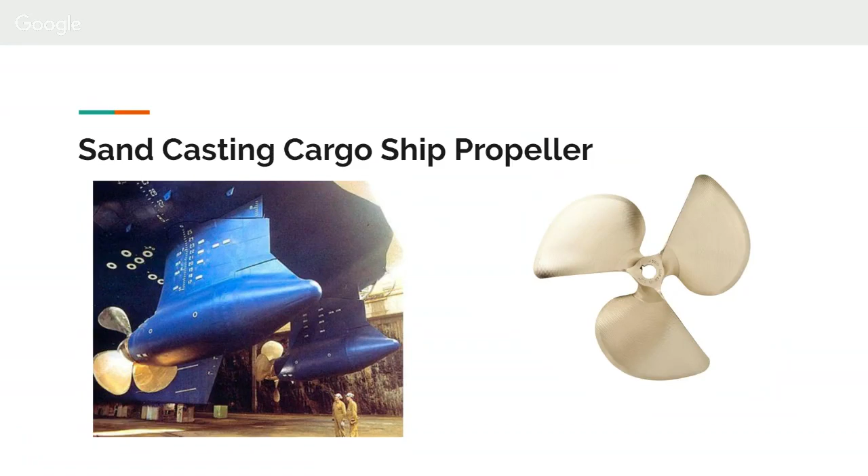My name's Luke Cranford. I'm with Joel Boyett and Mason Scott, and we're going to talk about the process of casting a propeller used for large ships. Here, I'm Mason Scott. This is a couple examples of the type of propellers we're talking about. These are typically found on your large oil tankers and cargo ships that are going from continent to continent, carrying trade goods, things like that.

The design of the propeller, it has to be cast in one solid piece because if there's any seams or anything in it, it'll affect the efficiency. And as you can imagine, the efficiency on these ships is very important. They also have to be lightweight. For as heavy duty as they are, they have to be lightweight to maintain that fuel efficiency, as I mentioned. They also have to be incredibly durable because the lifetime of these propellers, they're expected to last over 1.4 million miles seafaring.

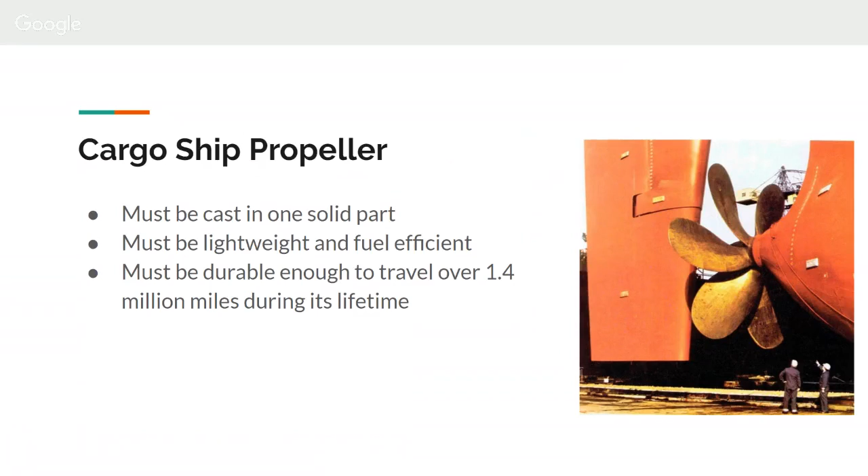The composition of the alloy used in these propellers is predominantly copper, about 80% copper in most cases. The other metals they use are typically aluminum, nickel, iron, and zinc. They specifically chose these metals because the blend of these metals creates a very tough, durable alloy that can withstand all the forces that are going to be thrown at it out there in the ocean, while also maintaining that durability that we mentioned.

And these metals were also chosen because they need to be cast into this mold, and they need metals that will take the shape of the whole propeller, because as we mentioned, they can't have multiple pieces of the propeller just stuck together somehow. The foundry that is required to heat these metals up to liquid is actually heated to an excess of 1,800 degrees Fahrenheit.

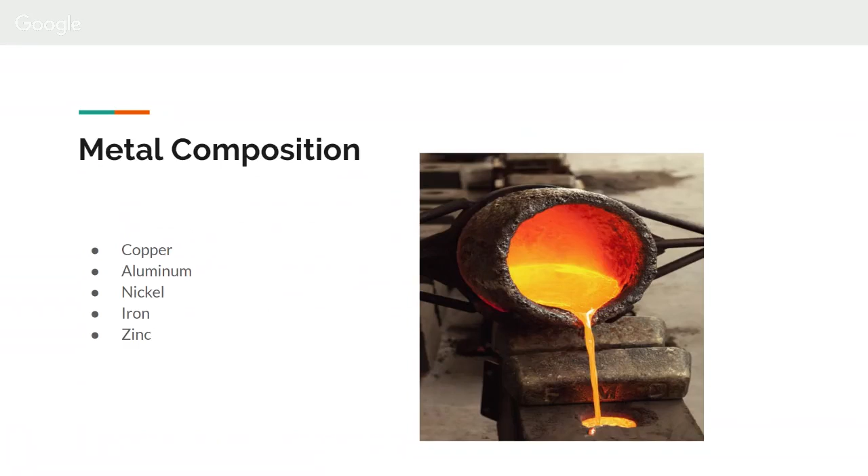Yeah, so like Mason was talking about, this must be cast in one solid part. So they do this through a sand casting process. And sand casting has a few parts, but we're just going to highlight some of the main ones. So the first step in the process is to create a pattern. And for this propeller, it's done using wooden planks, as shown in the picture on the right. These planks are put together using glue, screws, or just any other method to fasten them together. And it's created in the exact same shape as what the propeller is going to be.

And so once this pattern is put together, it's inserted into the mold, and it's covered with sand. So sand totally covers every piece of this pattern, so there's no air left in there. There's no other extraneous materials. It's just the pattern and sand. And then once the pattern and sand are in there, a hole is usually placed in the sand for a pouring area, and then also another area so that once the pattern's been full of metal, a little bit of the molten material begins to ease out, so you can tell when you need to stop pouring.

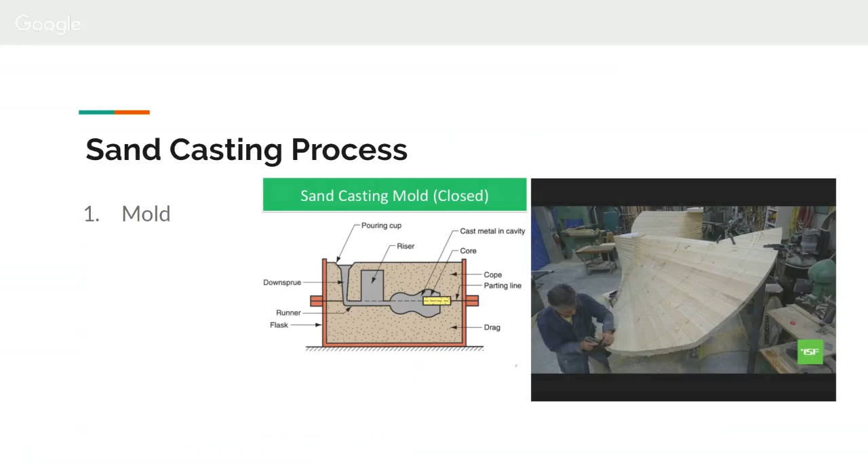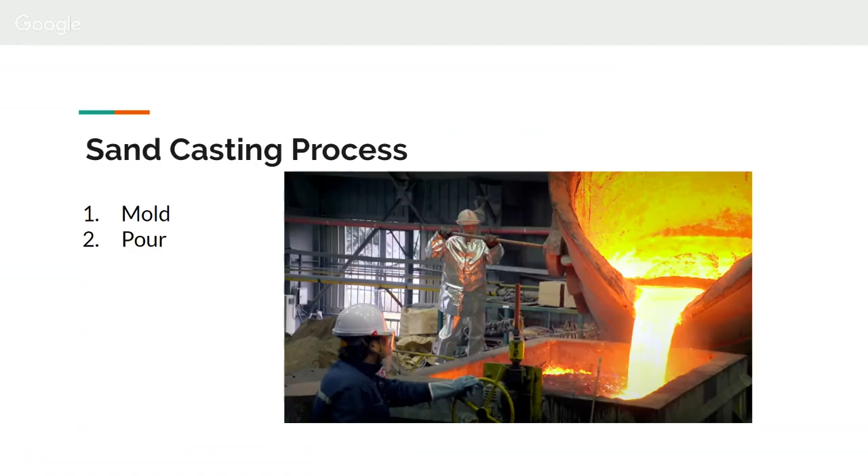So once the pattern is inside the sand and everything is packed in, the pattern is carefully removed, leaving an open cavity in the exact shape of the propeller pattern. And so once you have this cavity in there, you heat up the metals to over 1,800 degrees, so they are one solid liquid. Once the liquid is the right consistency, it's poured into the mold, and enough is poured in so the entire pattern is full. Like I said earlier, a little bit of the material begins to ease out the top. And then after that, it's allowed to cool and harden for 5 to 6 days in this scenario.

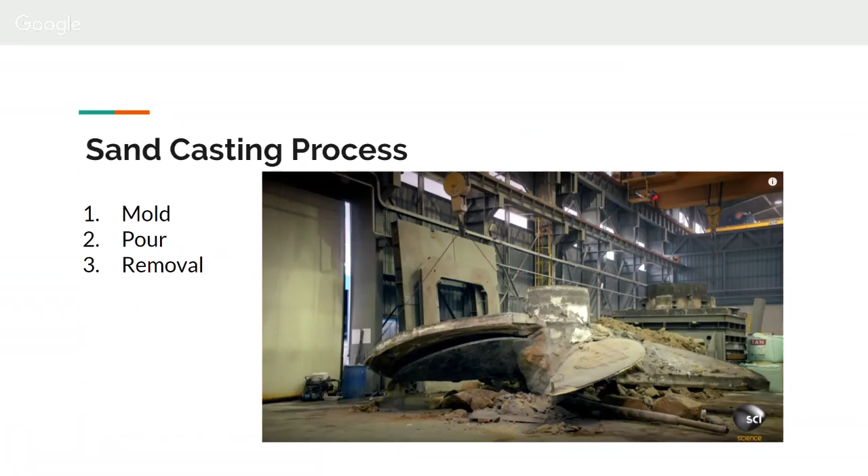So once it's hard, it's able to be taken out of the mold, and then any excess or debris from the sand, because it's so hot that some stuff sticks to it, all needs to be removed. So using a hammer or a chisel, or in this case, since the propeller was so large, an excavator, any excess debris was removed from the actual solid propeller part.

Hey, this is Joel. So as Luke and Mason were both saying, this is cast into one big piece. So as it comes out of the mold, all of the sand and stuff sticks to it, and it's really hard to get all that stuff off. So they have to grind it down and get it as smooth as possible, because as Mason was saying, the ship travels 1.4 million miles or more. So the propeller really needs to be very efficient, because as it travels, it'll get real beat down by the ocean and stuff.

As you can see in this picture, it's ground down by an automated milling machine. This gets it as smooth as can be with no bumps and no errors. So the propeller needs to be as smooth as it can be, so when it travels, it's very gas efficient, because this saves the cost on gas and all that good stuff.

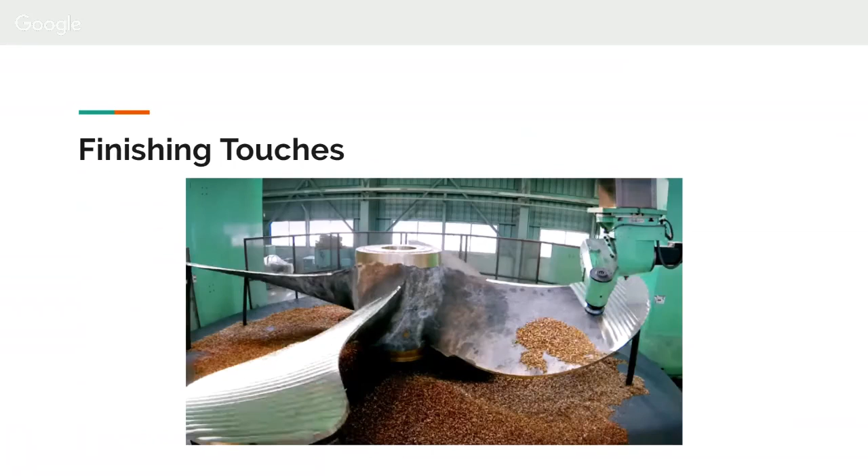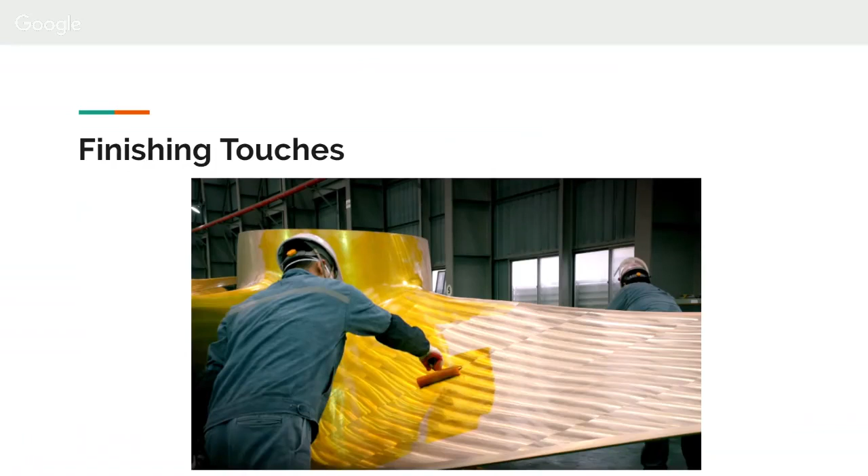And they have to add a yellow material to it. This is anti-corrosion. As you can imagine, traveling in the ocean, the salt's pretty high. It corrodes it down a good bit. So without this material, the propellers wouldn't last near as long. They're supposed to last ideally up to 25 years. So without this anti-corrosion, they'd corrode pretty fast, and they would only last about half the time.

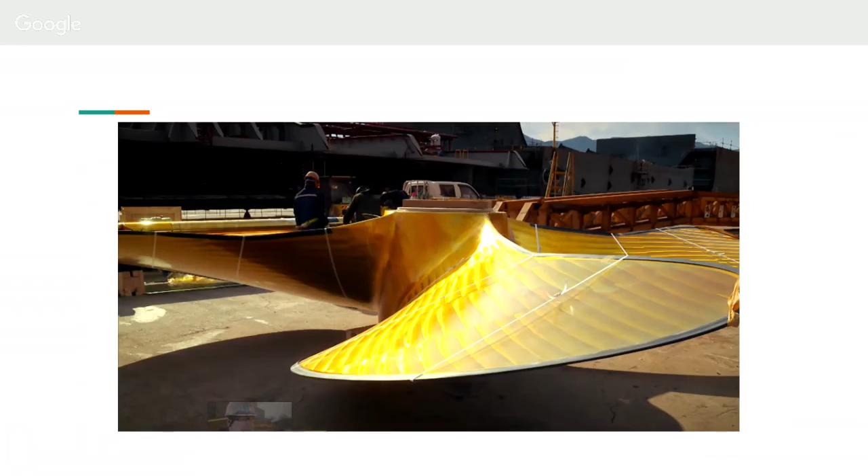So here's a final picture of the propeller. You can see how smooth and shiny it looks, and all the yellow anti-corrosion stuff on it. So with all this, it ensures a very efficient propeller. Yeah, and then from this point, you can see it's on land still. And so it's a big process to actually lift the ships up to be able to attach propellers to the bottom of it. And that will take another week or so before the propellers are actually in use.